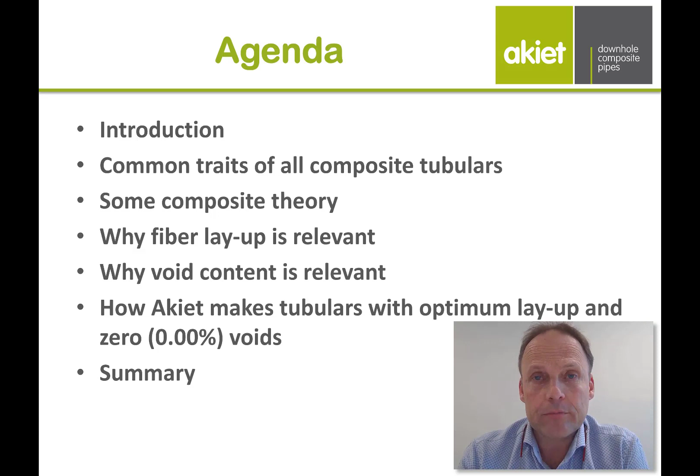Then I'm afraid I'll have to bother you with a bit of composite theory on how composites work. And then I'll focus in a bit more on the importance of the orientation of the fibers, which we call the fiber layup. After that, I'll take you through the importance of voids in the structure of composite. And then I can demonstrate why Akiet's tubulars are actually different than other composite tubulars, and how they deliver a fantastic result, especially when it concerns the orientation of the fibers and the void content. And I'll summarize at the end.

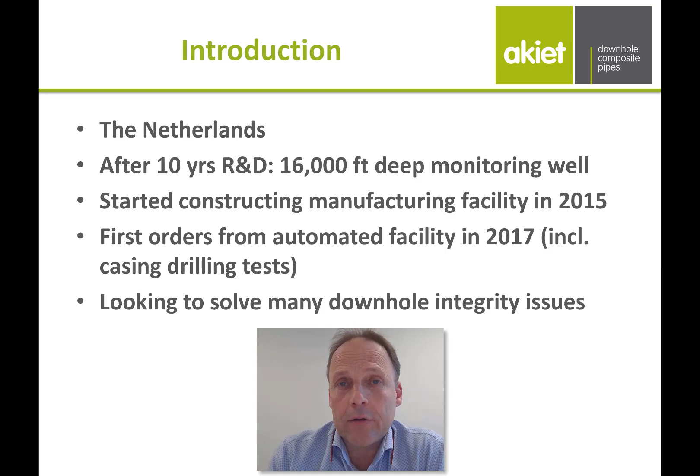Just introducing Akiet to you. Akiet is a Dutch company from the Netherlands, which after more than 10 years of R&D successfully installed a composite tubular system in the Middle East at 16,000 feet of depth, which thereby set a world record. Following that, we started an automatic production facility in 2015 in the town of Lelystad in the Netherlands. And from there, we delivered our first orders to customers in 2017. Akiet nowadays is developing the company further, and we are looking to produce and optimize those products that are going to help you.

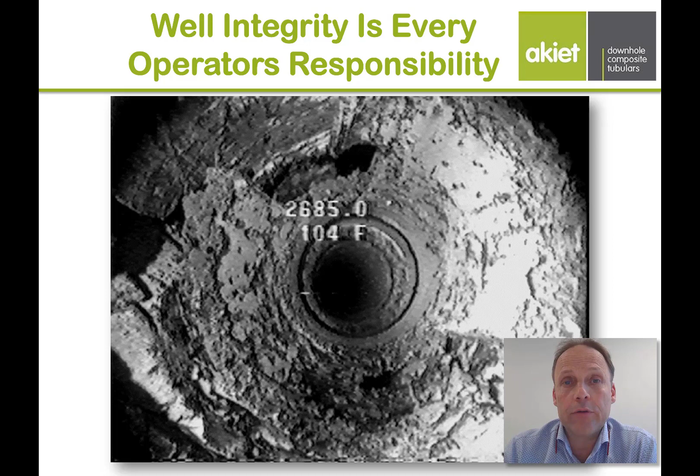Now, composites present a solution here. And composite tubulars, although they vary in materials that are used and how they're put together, they have certain things in common. Generally they are resistant to corrosion, and they're resistant to chemical attack from most chemicals, including CO2 and high levels of H2S. They're more flexible than steel, about 10 times more flexible, which means that there are lesser forces when you have to install in deviated wells and through kick points.

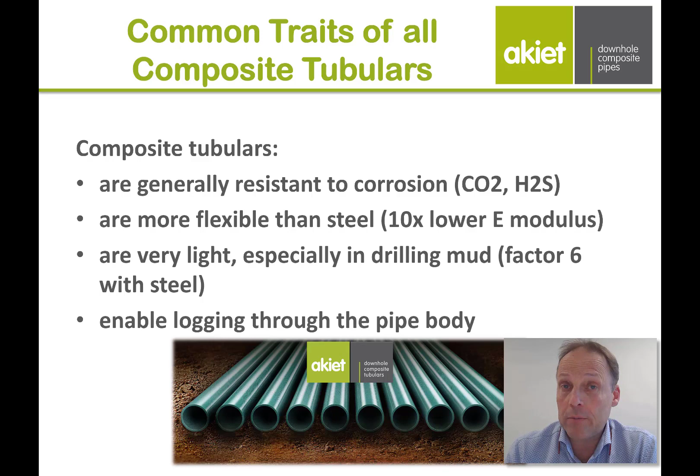They're very light, especially in drilling mud. The total weight of a composite string can be about a factor 6 less than that of steel. And with composites, you'll be able to log from within the protection of the casing and do the logging you want in reservoir. So how about some composite theory, and why is composite different than steel?

Well, first of all, the basic rule of composite means that it consists of more than one material, in most cases 2 materials. The one is the fiber, and then we think about glass, carbon, and there are resins, and those can be epoxies, polyesters. The resin, in fact, is reinforced by the fiber, which is why we refer to GRE, which is glass reinforced epoxy. Now, there are some variables in the design: the kind of fibers you use, the amount of fibers you use, and the orientation of these fibers in the structure that determine the physical properties of the composite tubular.

Composite tubulars thereby are anisotropic. Anisotropic means that they have different properties and different strengths in different directions, which is different than steel. Steel, no matter what way you push it or pull it or load it, it's always going to react exactly the same. But in composites, that's different. And you can actually engineer composites to match any given load case. Engineers need to understand, when starting engineering with composites, that it's something you can make use of. You can make use of the anisotropy of the composite material.

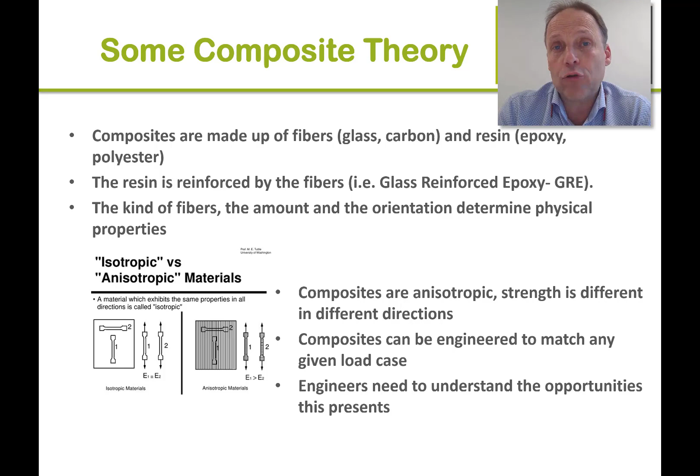So one of the things we have to think about is the fiber layup. And the fiber layup is the term in composite country for the orientation of the fibers. So for instance, if the requirement is very high tensile strength, then what we do is we put more fibers in the axial direction of the tubular.

And the other way, if we require high burst strength, then we will position more fibers in the radial direction of the composite structure. And if we want both high burst and high tensile strength, we'll just have to apply more fibers in both directions, which results in a thicker wall of the pipe. Now ideally you would have the fibers run in the direction of the dominant forces. Dominant forces downhole are typically in the axial direction and in the radial direction.

If I can please take you to the slides that you see below. They have 3 bars. The blue one is for a composite structure like Akiet can make, where the fibers run in the 0 and 90 direction. So all the fibers run in the axial direction or in the radial direction. And in fact, there's twice as many in the radial direction as the axial direction. A lot of fiber in the radial direction, which means a high burst resistance.

If you look at the tensile, you'll see that where the blue bar is taller on the left, on the right hand side, the gray bar is taller. So there's a higher tensile strength for the gray, and the gray has the fibers in the axial direction. In collapse strength, you see there's not much difference between the orientation of the fibers, either radial or axial, and the same goes for compressive strength.

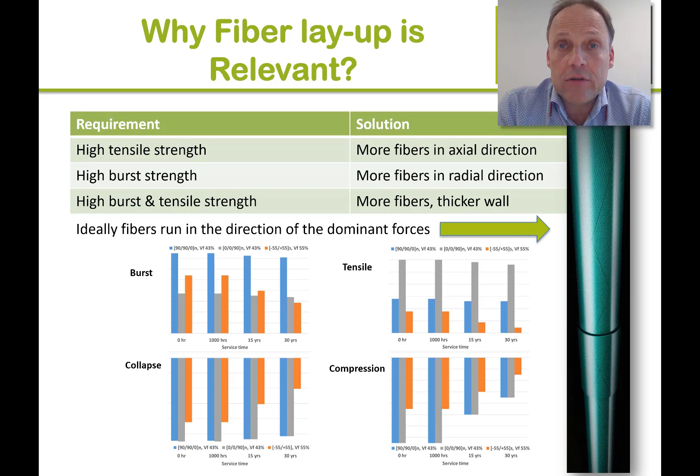So the conclusion of this slide is, if you have a 0-90 layup with all the fibers in the radial and in the axial direction, you're going to get better performance with time than you would have if the fibers run at a different direction.

Another aspect of composites is void content, because ideally a composite is made of resin and fibers, and there's no voids in the composite structure. Now why are voids so relevant? In the graph on the left hand side here, you see that with increasing void content on the bottom axis, the strength fraction decreases. So with higher voids, you have to compensate for the strength of the material by degrading it. And very typically at 1 to 3% more void content, the composite structure will be up to 20% weaker.

Please note in that graph, what I put in the yellow arrow box, is that this graph has a cutoff at 0.6% void content, because normally manufacturers cannot go below 0.6% void content. Now where the graph on the left hand side is one that is instantaneous, it's about at any given time how you should compensate for voids in the material strength.

The chart on the right hand side accounts for the factor of time, and what you see there is that when there's 3% voids, 85% of the remaining strength is reached after 1 to 2 years, and after that the material will be even weaker.

At 1% void content you can get about 18 years of life before the performance drops by more than 15%. And for a structure with 0 void content, the structure will be stronger than 85% of its original strength up to 70 years. So the factor on the right hand side diagram will overlay the one on the left hand side. So at 2% void content, you may need a strength fraction of maybe 85% because of the voids, and then realize that there's another 85% you have to correct for after about 5 years of life.

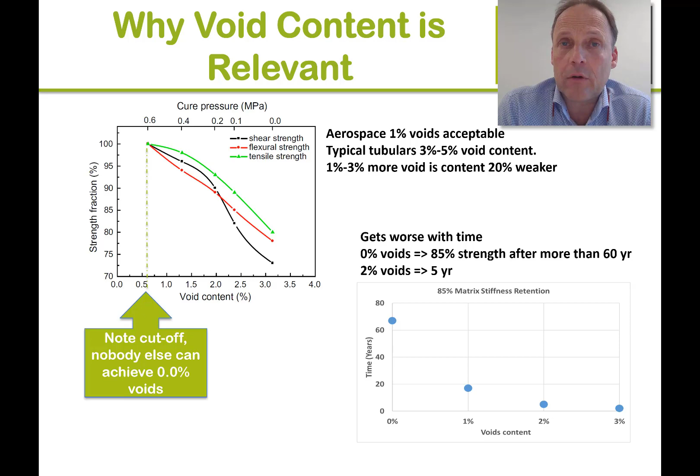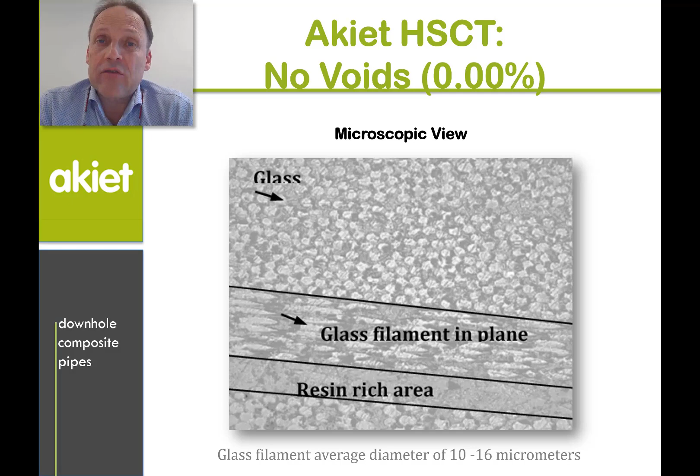Microscopic view of a cut through a composite body, which has alternating layers of glass that are perpendicular to the cut, and those that are almost parallel to the cut, which shows long ovals in the glass filament in plane. And there's a resin-rich area, which is only resin, there's no glass there. Just about the scale of this slide, a typical glass filament will be about 10 to 16 micrometers. So that's about 1/100th of a millimeter. If there were any voids in this cut through, they would show as black, and as you see, there are no black voids in this structure.

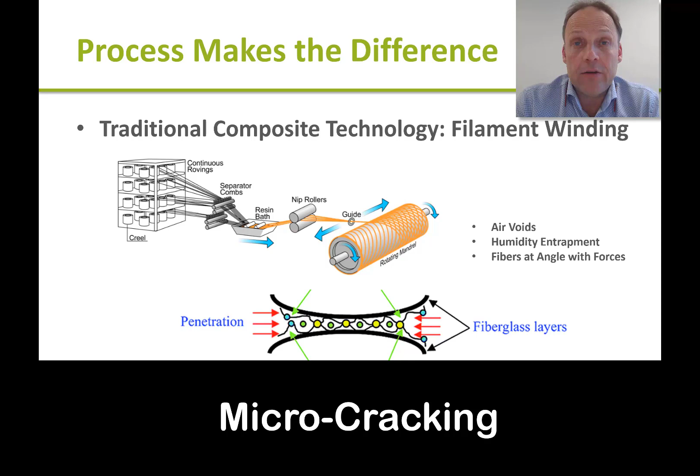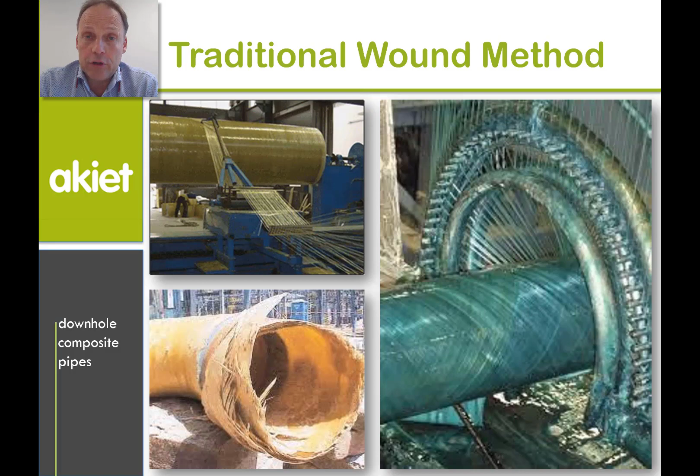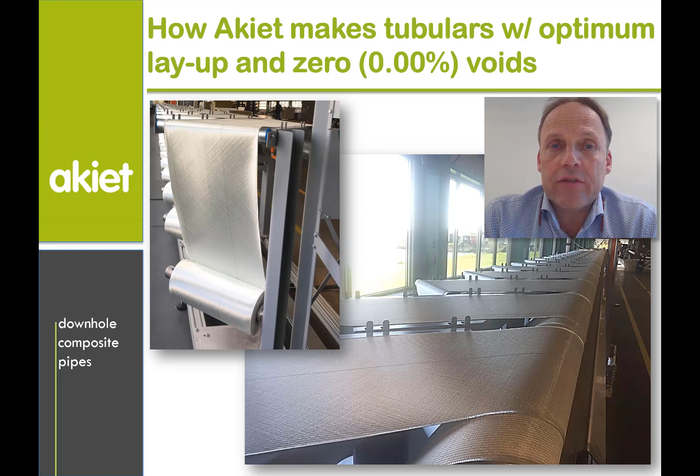This picture shows a typical filament winding operation. A lot of fibers at the same time being wound around the mandrel after being wetted by the epoxy. Now this looks different. This is how Akiet makes its tubulars. So this works in a dry state, and the material there is the glass, which has the glass fibers running in different directions, over which we have full control. It's placed within a mold, and subsequently the mold is centrifuged. It's rotated at very, very high revs to actually create forces of up to 500 G, 500 times the gravity.

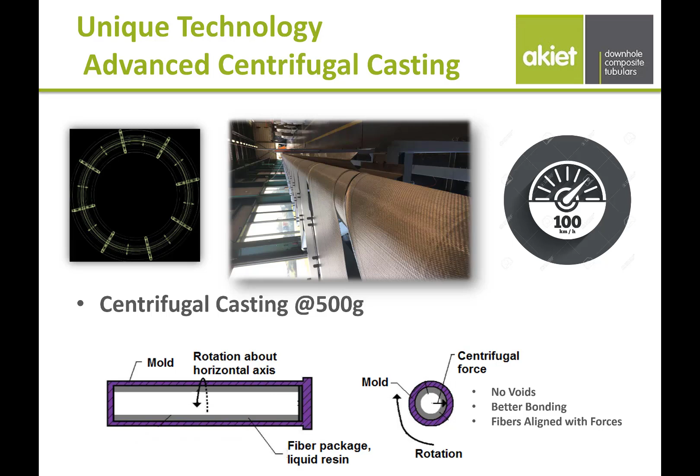So after the glass is placed on the inside of the mold, and it will sit against the surface on the inside, then the centrifuge starts. It really starts rotating fast, very high revs, to generate hundreds of G forces. And then the epoxy is inserted in the mold. The epoxy, of course, flies to the outside under centrifugal forces and penetrates all the way through the glass. And because of the spectacular amount of G forces, all moisture and all air is being driven out of the structure and goes to the inside of the mold. And after hardening, what we're left with is a pipe body that is totally free of voids, and the glass sits exactly in that orientation where we've engineered it to be.

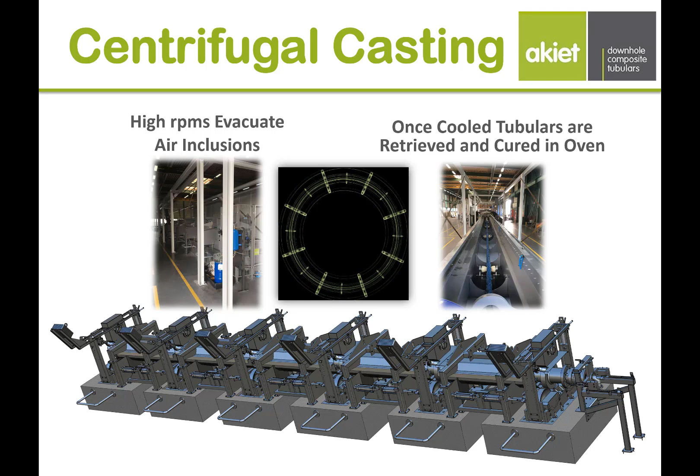If you look at some of the technology involved, because Akiet is the only company that has mastered this technology, the machines, of course, are not only very complex, but they're also unique, and they're fully automated. And that gives us total control over the repeatability of the process and traceability of the result. As far as testing is concerned, there are a lot of test setups, and many of those were constructed because our customers have asked us certain questions and would like certain tests to be performed. And of course, we will readily oblige, because we also want to make sure that the customer has no doubts about the suitability of the tubulars.

So on this particular test bench, what we do is we test for wear. So what happens if you would install a casing and then you'd like to drill through it, and you get wear of the casing from the drill string being rotated? Well, what we saw is that there is hardly any discernible wear after hours and hours of drill simulation.

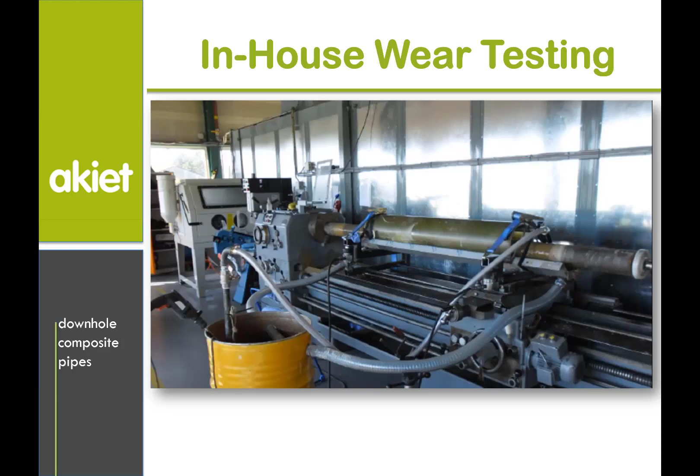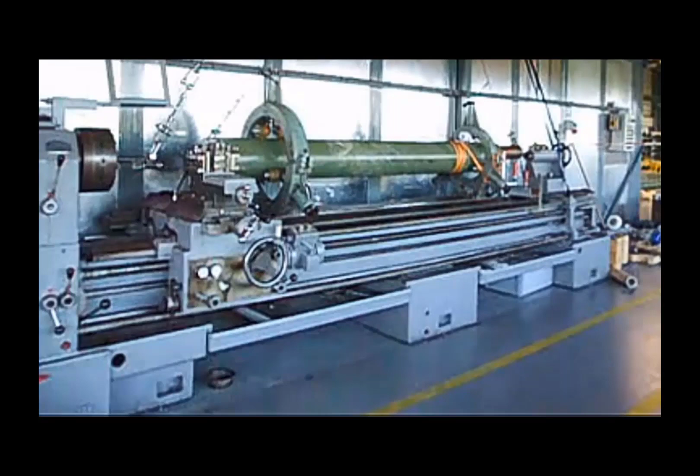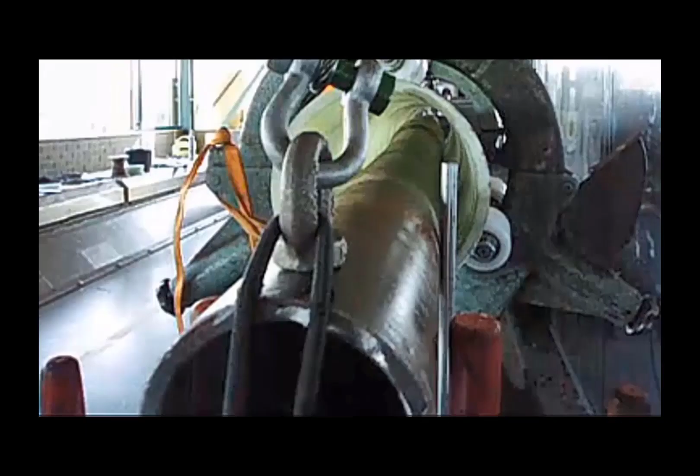Another test that we did was a very similar application. What happens when you drill through the casing and the banging of the tool joints against the inside. So this is a machine where there's an installation which drops the tool joint on the inside of the casing, and we've run that for hours and hours on end, mud in the system. The result was the same. There's no delamination, there's no wear, and the pipe body actually holds up extremely well.

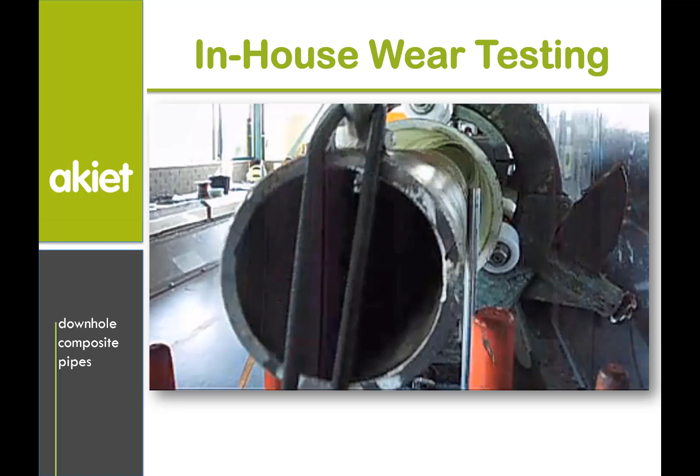But my point basically about this video is, if there's a concern by a customer about a particular property that needs to be tested, then we'll test it, we'll write up the protocol together and make sure that we address any issue.

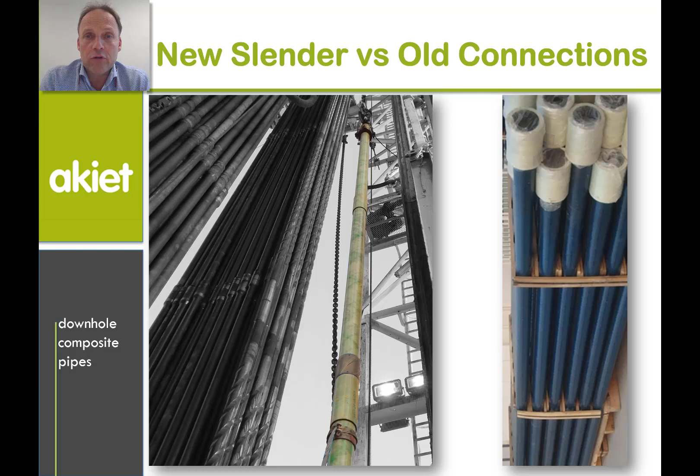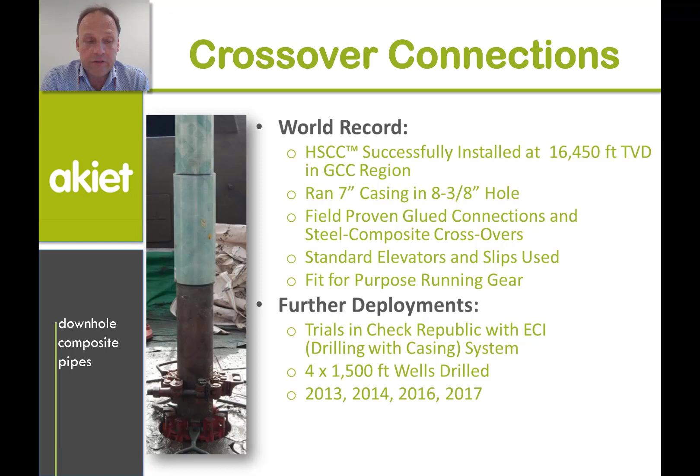In terms of integrating the composite with the rest of your drill string, there are crossovers from steel to composite, from composite to steel. And those have been tested, both in the world record installation at 16,000 feet, but also in drill tests with composite casing drilling applications, which we run together with our strategic partners, HWT. And we've successfully done that in a couple of wells, and there's no discernible wear and tear on any of these crossovers either.

But please realize that this is not the end point. Where Akiet is now is on the way to something even greater. So we have our entry model, and our entry model is a composite that is 100% void-free. It will last, and it's going to outperform any other composite out there. But there are challenges, of course. We want to have all sizes available, and we want to make sure that the temperature resistance increases.

Where we're currently constrained to around 100 Celsius, we are underway with plans with strategic partners in a European subsidy project to raise that to about 170 degrees Celsius, and of course, with the typical pressures that go with those temperatures as we drill down deeper into the earth. So slowly and with continuing R&D, we'll increase the range and the performance of the tubulars. And where we stand now is tubulars in a few sizes up to 100 degrees Celsius.

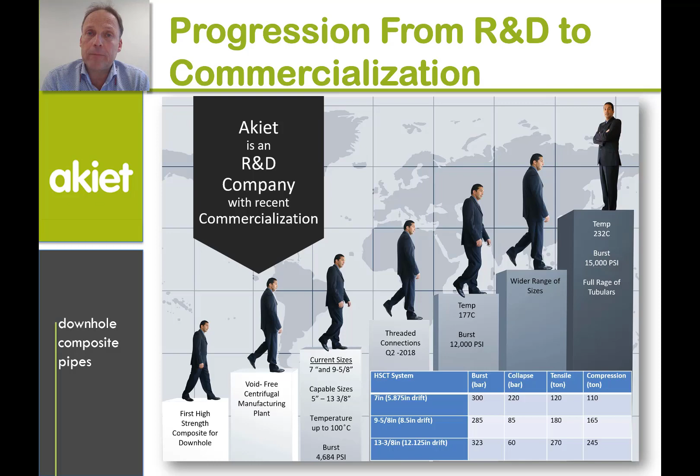So in summary, every composite consists of resin and fibers. The orientation, the structure, and the amount of fibers determine the physical properties. And these physical properties can be engineered to be different in different directions to apply the strength where you need it in your application. Having fibers in the optimal directions, which means parallel to the greatest forces in your application, determines how well the material is going to perform in time.

Voids in the structure are always a bad thing, and there's a very distinct benefit of not having any voids in your composite structure. Akiet high-strength composite tubulars have no voids, 0.0% voids, and all the fibers run exactly in the 0 and 90 directions, which are the directions of the forces and the pressures in a downhole application. So we have a unique technology, creating extreme amounts of revolutions and g-forces to result in a really strong pipe body, engineered specifically for downhole use, because downhole applications is all what Akiet does.

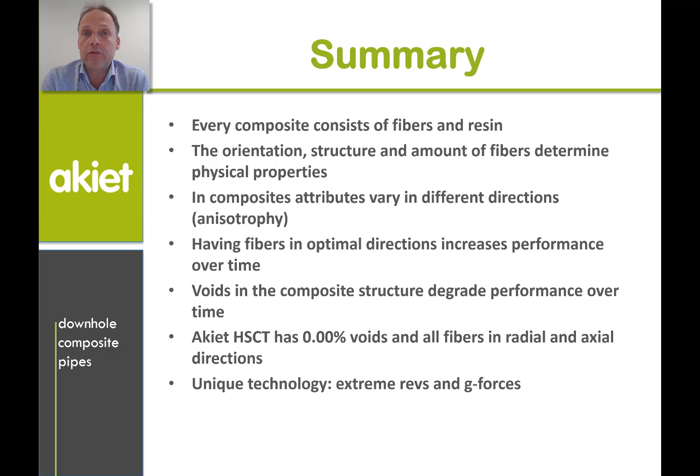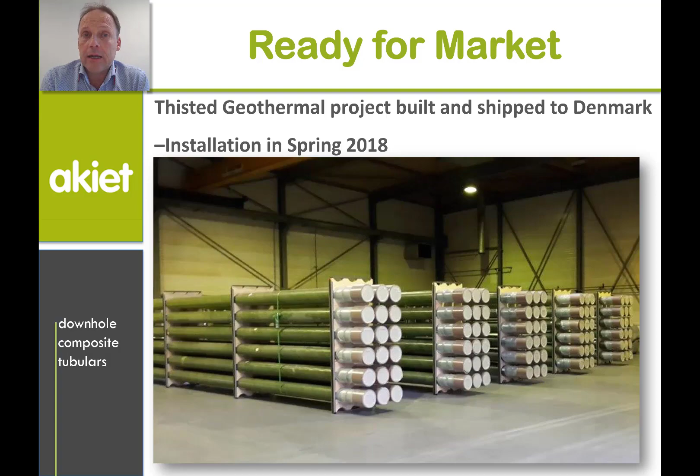We're ready for market and we'd like to work together. The plant is fine, the product is great, we have the skills to help you with installing them on site, and we will be really happy to work together.